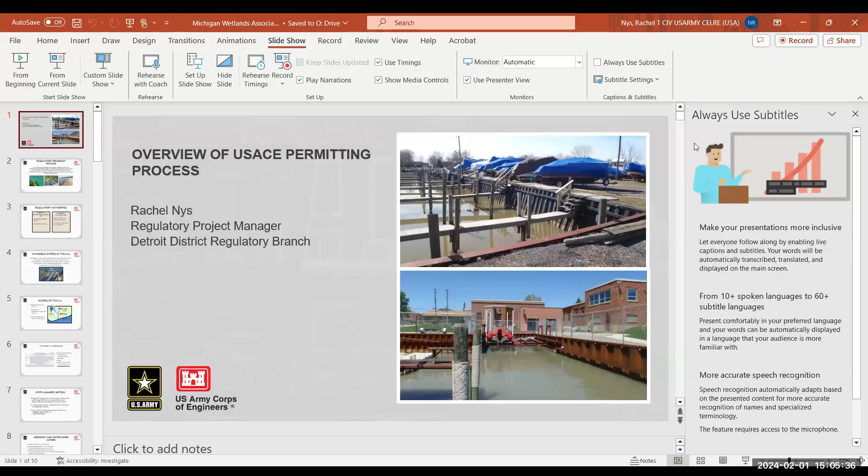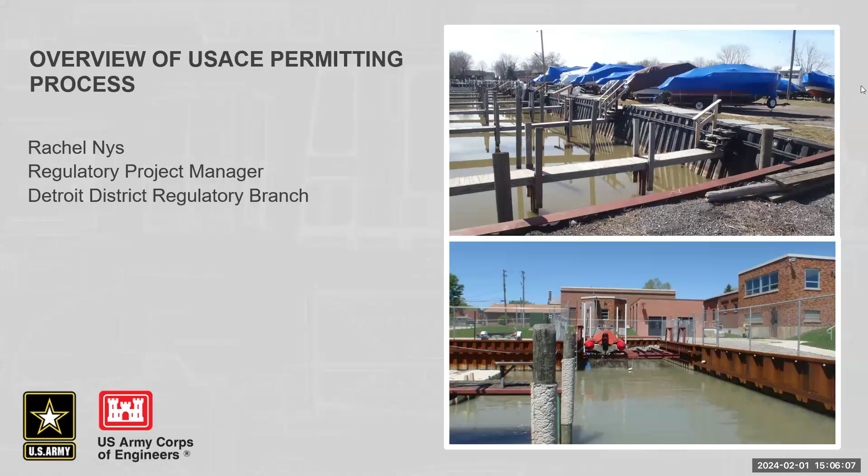All right. Thank you, Elise, for inviting me to come and present today. As Elise said, I'm a project manager for the Corps of Engineers working in our Western section. So I process applications on the west side of the state and in the Upper Peninsula. I've worked for the Corps for 24 years. Today, I'm going to start with some basics of our permitting program and then walk you through the steps of getting a permit and more details about some of our various types of permits.

The mission of our regulatory program is to provide strong protection of the nation's aquatic environment, and we do that through permit evaluation and enforcement of permitting laws. We have two main statutory authorities for the regulatory program. The first is Section 10 of the Rivers and Harbors Act of 1899, under which we regulate structures and work in navigable waters of the U.S. This includes projects such as dredging and placement of fill material in the waterway, and regulated structures, which can be seasonal, temporary, or permanent. The second authority is Section 404 of the Clean Water Act, under which we regulate discharges of dredged or fill material into waters of the U.S., including wetlands.

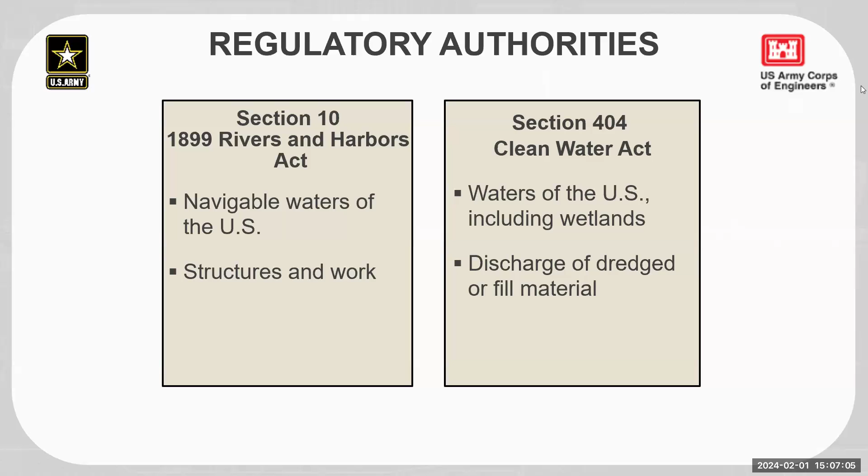Under Section 10, our regulations define navigable waters as waters that are subject to the ebb and flow of the tides, which obviously you don't really need to worry about here in Michigan, and/or waters that are used, were used, or could be used to transport interstate or foreign commerce. As far as waters of the U.S., these are navigable waters of the U.S., tributaries to the navigable waters, and wetlands that are adjacent to those waters.

And as a lot of you have probably heard, the recent Sackett decision from the Supreme Court changed the definition of adjacency and waters of the U.S. And there's still a lot of court cases involved with waters of the U.S., and the definitions changed a lot over the past few years. I think it was at least three times in last year alone. So I suggest that if you're not sure if a wetland on your property is in our jurisdiction, that you contact us to perform a jurisdictional determination.

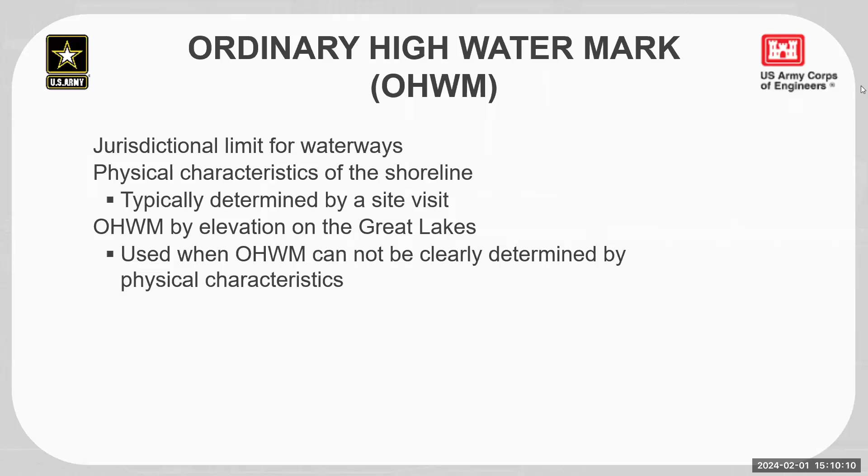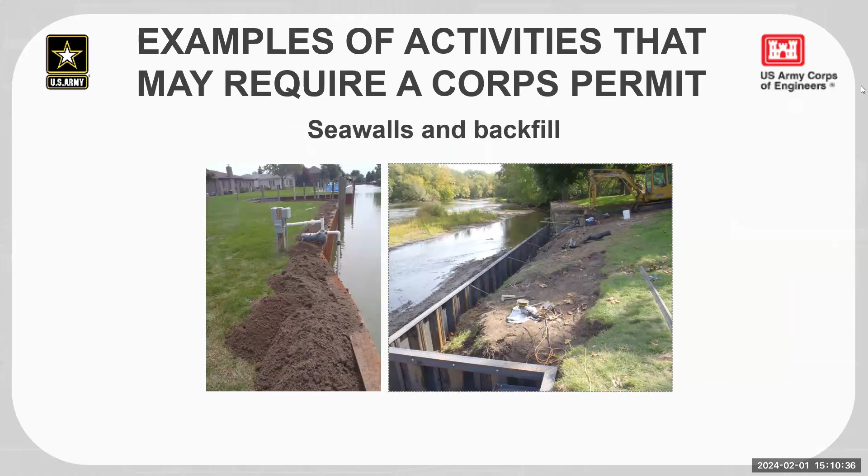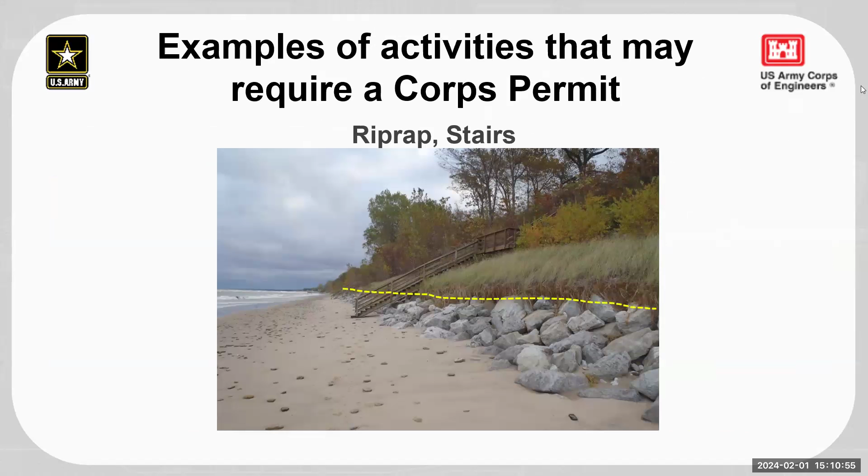And here's some activities that might require a permit from the Corps. I'll just go through them quickly. Seawalls and the associated backfill, riprap or revetments, dredging, and the placement of fill in wetlands or in waterways, stairs that extend beyond the ordinary high water mark, which is seen here, and temporary construction measures, such as in this photo, the fill pad that's in the waterway and the silt curtain would both require a permit.

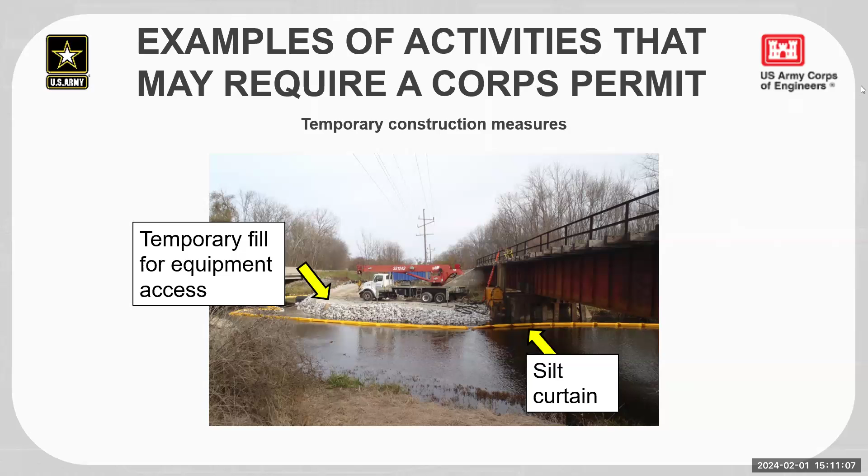So there are four main steps in our permit evaluation process, which include an optional pre-application meeting, the submission of a permit application, the Corps' evaluation and coordination of the application, and the decision or outcome of the permit process.

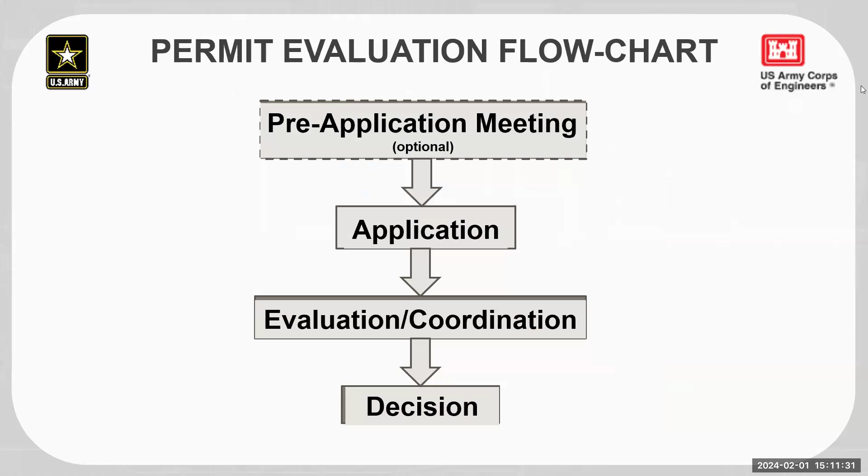Pre-application meetings are entirely optional. We hold them at your request and they're free. These meetings are not reserved for developers with large or complex projects. It's available to anyone and is useful for both our understanding of your project and your understanding of our program, as well as an opportunity to discuss reducing impacts of proposed projects.

A pre-application meeting can be a formal process where we meet you on site or in our office, but it can also be as informal as a phone call or an email. We're happy to answer your questions. These meetings are very useful to streamline the permit evaluation process, especially for complex projects.

And whether or not you take advantage of the pre-application meeting, the next step is to submit a permit application through the MiEnviro portal link, which EGLE hosts. And on there, you can fill out the EGLE USACE joint permit application, which can be used for any permit request. And although it's one application, each agency conducts a separate review process and comes to a separate independent permit decision. In most cases, you'll require both the EGLE permit and the Corps permit before you start work.

And for the few times when you need a Corps permit but not an EGLE permit, you can fill out this application, which is found on our website. Most of the time when I see this, it's for projects on tribal land where you do need a federal permit but not a state permit.

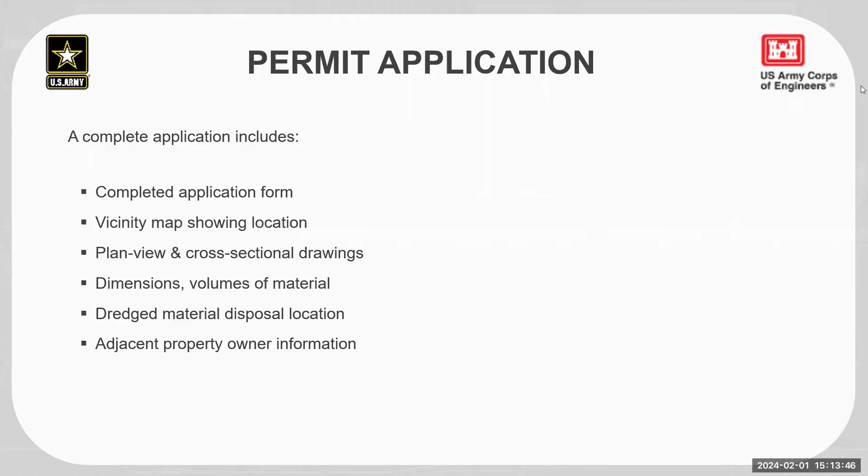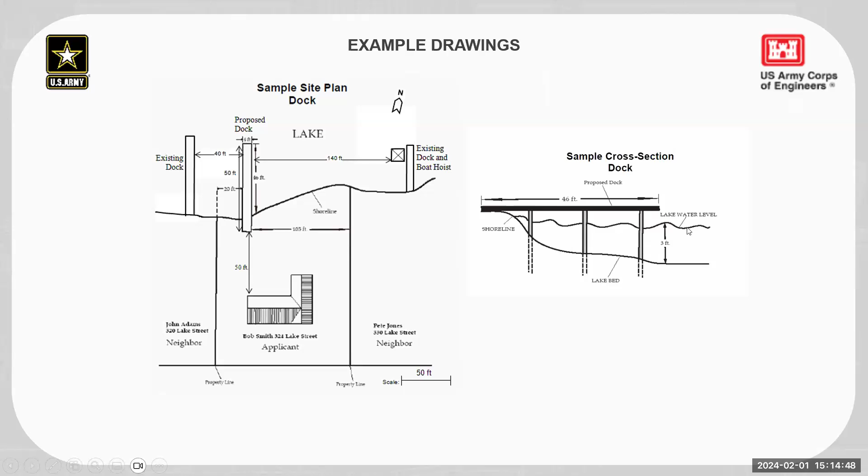Once we determine that your permit application is complete, we begin our review. There are two main categories of permits: general and individual. The review process is different for different permit types. The type of permit your project qualifies for depends on the type of project and the extent and nature of impacts to waterways and wetlands.

General permits include regional and nationwide permits. They authorize certain categories of activities such as docks, seawalls, maintenance work, and many shore protection projects. These categories of activities have been reviewed in advance and determined to have minimal individual and cumulative impacts. Therefore, the evaluation process is simpler and faster for these types of permits. This is a great reason to take advantage of pre-application meetings with Corps staff. We can discuss ways to tailor your project to meet the general permit criteria.

Projects that don't qualify for general permits are evaluated as individual permits and are subject to a more intensive review. Letters of permission have an abbreviated agency coordination process and can authorize structures and dredging in navigable waters without a fill component. Standard permits have a more intensive review process, which includes a public notice and an environmental assessment, which weighs the benefits and detriments of a project to the public interest.

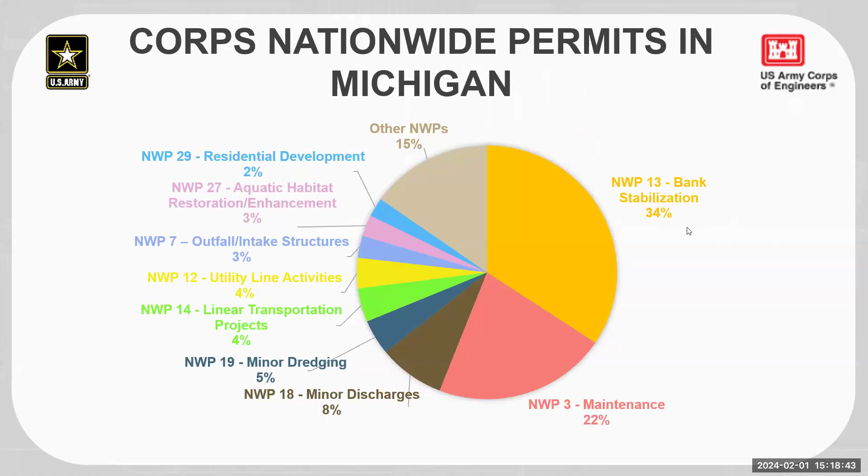For most categories, there's also a list of additional conditions for EGLE Water Quality Certification and Coastal Zone Management Act consistency. If a project meets all these conditions, the Corps might be able to verify the general permit before EGLE issues a permit. If not, we'd have to wait for EGLE to complete the review and issue a 401 certification before we can verify that your project meets that particular general permit.

Next, I'm going to discuss a few of the most commonly used general permits. I'll talk about some of the key general permit criteria here, but I'm not going to go through all the criteria for each permit type. Our regional permit covers a lot of common structures, including many seawalls. To qualify, replacement seawalls must be placed so that the waterward face of the new seawall is no more than 1 foot waterward of the existing seawall.

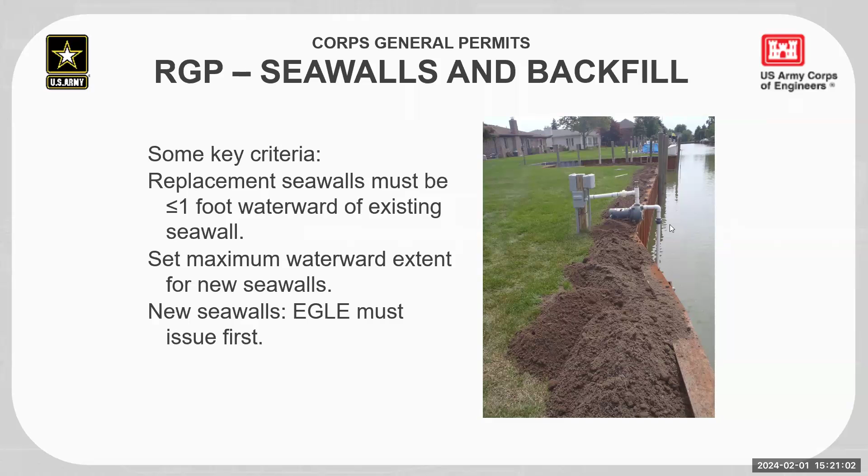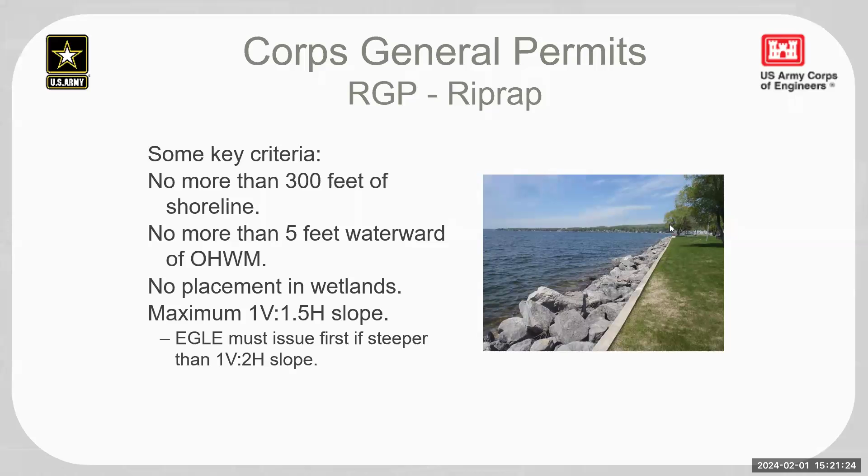The regional permit for riprap limits the length of the riprap along the shoreline to 300 feet in length. The riprap can extend no more than 5 feet waterward of the Corps' ordinary high water mark, and it can be at no more than a 1 to 1.5 slope. Nationwide Permit 13, which is bank stabilization, is typically used to authorize riprap, revetments, and other bank stabilization projects that have minimal impacts. Some of the key conditions are listed here.

Some of the limits on Nationwide 13 can be waived if we determine the project would have minimal impacts and after we coordinate the project with state and federal resource agencies. That coordination adds 10 to 25 days to our review process, and we'll consider those comments when we determine whether or not the project qualifies for the nationwide permit.

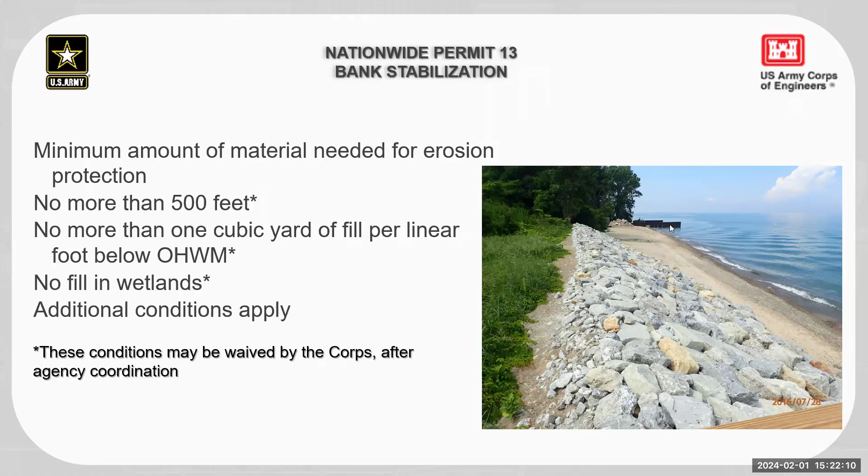Letters of permission can only be used for Section 10 work, so no fill material. For letters of permission, the Corps conducts an abbreviated coordination with adjacent property owners and agencies, including EGLE, the Environmental Protection Agency, Fish and Wildlife Service, and DNR Fisheries Division. And those agencies have 15 days to comment on the proposed work.

If we receive comments, we'll try to resolve any issues with the applicant. But if the issues can't be resolved, then the project may be elevated to the standard permit review process. After the coordination period ends and any comments have been coordinated, we move forward to a permit decision. Letters of permission are usually valid for 3 years from the date of issuance.

And standard permits have a more intensive review process. Once we receive a complete application, we publish a public notice, which typically allows 30 days for comments. If we receive comments, we provide them to the applicant and give them an opportunity to respond to them. If we have specific concerns about the project, we might ask you to address those concerns at the same time, and we often request an alternatives analysis at this stage.

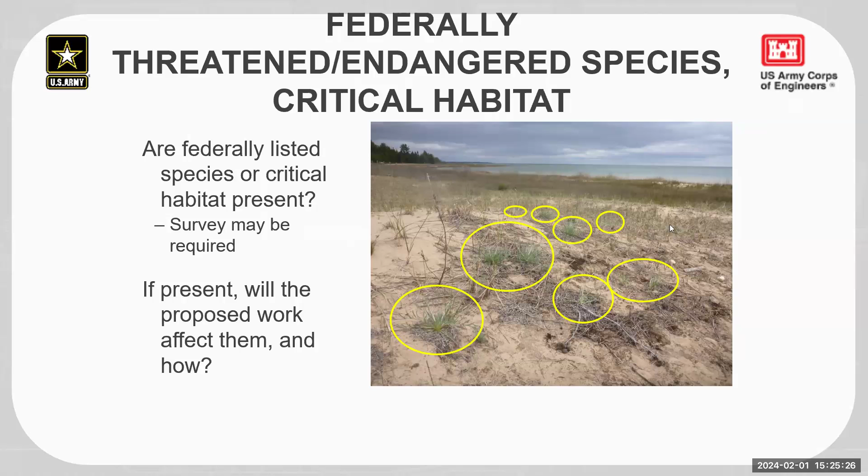We might coordinate with you to determine whether impacts to the federally listed species can be avoided or minimized. In some cases, permit modifications or special conditions might be needed to avoid, minimize, or mitigate for impacts to listed species. Some examples of special conditions that might be required include timing restrictions on when work can be conducted or monitoring for the presence of species during construction.

In addition to the Endangered Species Act, the Corps is also responsible for compliance with the National Historic Preservation Act. During the evaluation of each project, we identify any historic properties that might be located in the permit area. If any historic properties might be present, we make a determination of effect, and we consult with the State Historic Preservation Office if there's any potential to affect a historic property. We also consult with tribal historic preservation officers, or THPOs, for historic and cultural resources. The consultation process can also involve public input, and we identify and consult with any interested consulting parties, such as local historical societies as well.

To be considered a historic property, the property must be either listed on the National Register of Historic Places or be eligible for listing based on their historic significance or potential to yield information about the past. This can include historic districts, sites, buildings, structures, and objects. So this is pretty broad. People usually think of historic buildings, but historic properties can also include shipwrecks, parks, and bridges. Archaeological sites can also be historic properties, although they can be more difficult to identify if all the resources are below the ground surface. If a project involves ground disturbance in an area that might not have been disturbed previously, we might ask you to provide an archaeological survey conducted by a qualified archaeologist.

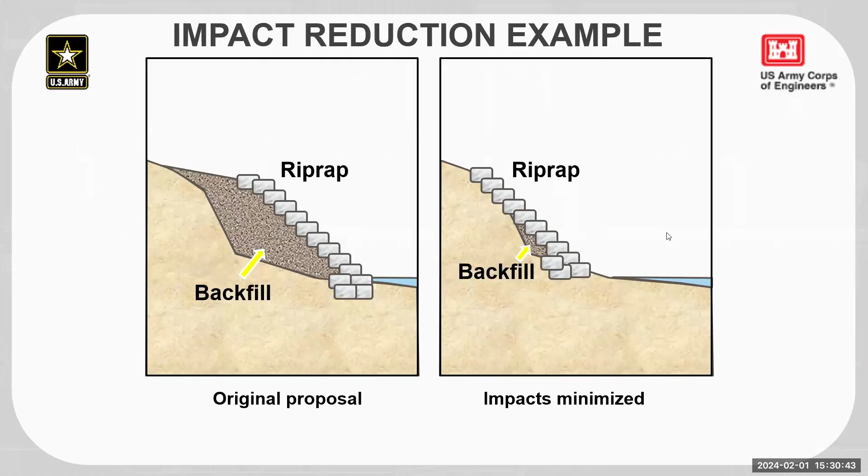The specific purpose for a project is an important aspect of our alternatives analysis. If the project involves wetland fill, we'll consider whether the basic project purpose is water dependent. For example, if the basic irreducible purpose of a project is housing, that's not water dependent. So if the basic purpose isn't water dependent, then we're required to presume that practicable alternatives are available that don't involve wetland fill and that these alternatives are less damaging.

The applicant can rebut this presumption by clearly demonstrating that other alternatives are not available or are not less damaging. And we might request that you provide an alternatives analysis that we'll consider in our review. The overall purpose is the more specific and detailed purpose that we use to evaluate less environmentally damaging practicable alternatives. This is similar to EGLE's analysis of feasible and prudent alternatives. If a project does not comply with the guidelines, then we're required to deny the permit.

When the coordination and evaluation is complete, we come to a permit decision. A permit could be issued as proposed, issued with modifications and/or special conditions, or in rare circumstances denied. I say rare because throughout the permit evaluation process, we work with applicants to try to avoid this outcome by discussing potential project modifications that we might be able to authorize.